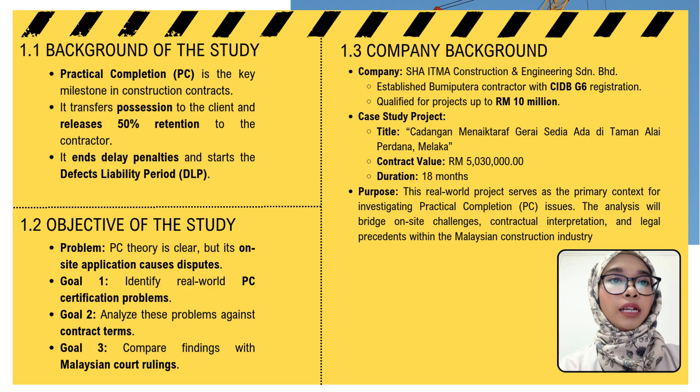This real-world project served as our primary lens. By examining the practical completion issues encountered here, we can bridge 3 critical perspectives, which are the on-site challenges, the contractual interpretation, and also the legal precedents within the Malaysian construction industry.

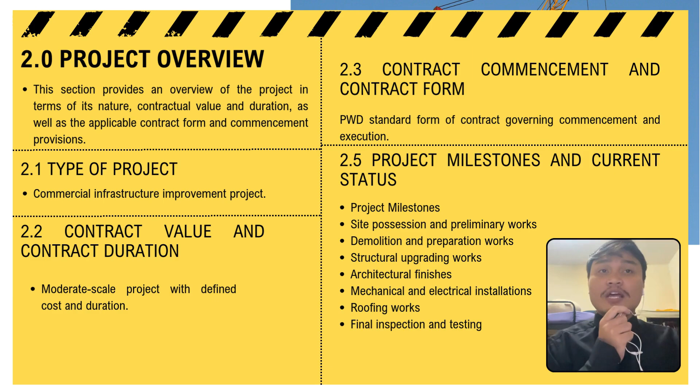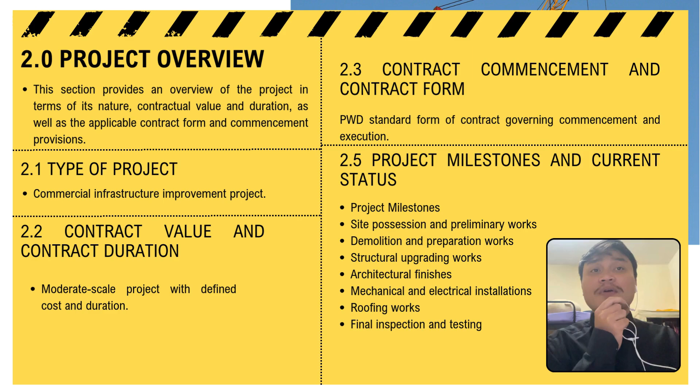2.3 is contract commencement and contract form. We are using a PWD standard form of contract governing commencement and execution. The project was executed under the PWD form of contract, with the contract commencement taking effect from the date of the letter of acceptance or the possession of site, whichever occurs later. From the commencement date, the contractor was contractually obligated to commence the works and complete the project within the stipulated 18-month period, subject to provisions relating to variation, extension of time and other contractual conditions under the PWD contract.

Next is parties involved: the client, the Majlis Bandaraya Melaka Bersejarah; the architect from Norman Selamat; the civil and structural engineer from Iras Perunding; and last but not least, the QS, ARR QS Consultancy Sdn Bhd.

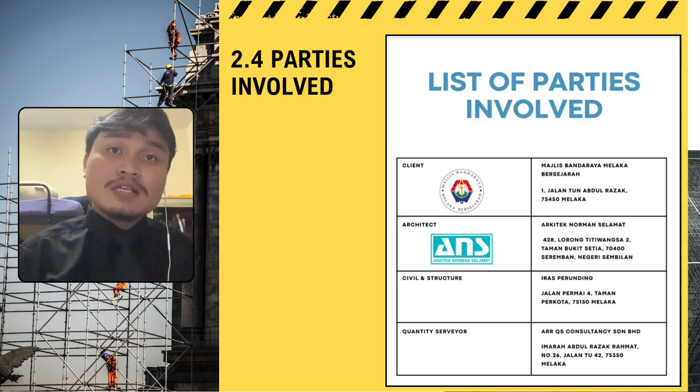Last but not least is project milestone and current status. Project milestones and construction stages. The project was carried out based on an approved construction program under the PWD form of contract, with clearly defined milestones to ensure systematic implementation and effective progress control.

The key stages included site possession and preliminary works, demolition and preparation of existing structures, upgrading works, architectural finishing, mechanical and electrical installation, roofing works, and final inspection and testing prior to completion. Current project status: the project has fully completed and has achieved practical completion, resulting in issuance of the CPC.

All construction works were executed in accordance with approved drawings, specifications, and contractual requirements, and the complete facility meets the required functional and quality standards for commercial completion.

Lastly is plan versus actual progress. Overall, the actual progress of the project closely followed the planned construction schedule. Most activities were completed within the stipulated time frame, and project performance remained generally consistent with the approved program.

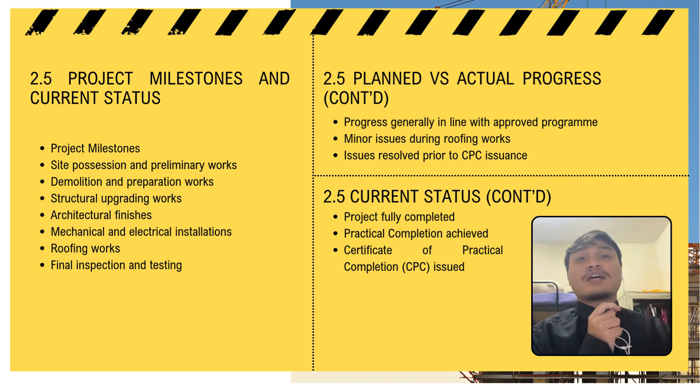Minor issues were encountered during the roofing work prior to the issuance of CPC. However, these issues were resolved without causing significant delay to the overall project completion. Further details on these issues are discussed in section 3 of this report. I will pass to Hazab to continue the presentation.

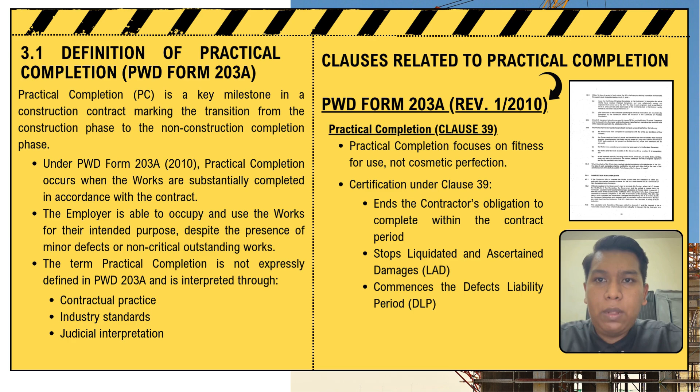The next important event is the inspection by the architect or consultant acting as the superintending officer, or SO, under clause 39 of PWD. The contractor must notify the SO that the works are ready for inspection, and the SO will then inspect the works to assess workmanship quality, compliance with the contract requirements and the overall fitness for the intended purpose.

Another critical event is testing and commissioning. Modern buildings involve mechanical, electrical and specialist systems that must be tested to ensure they are safe and operational. If the testing and commissioning are incomplete or unsatisfactory, the SO may delay the certification of practical completion. Therefore, successful testing, proper documentation and compliance with contractual procedures are essential before practical completion can be achieved.

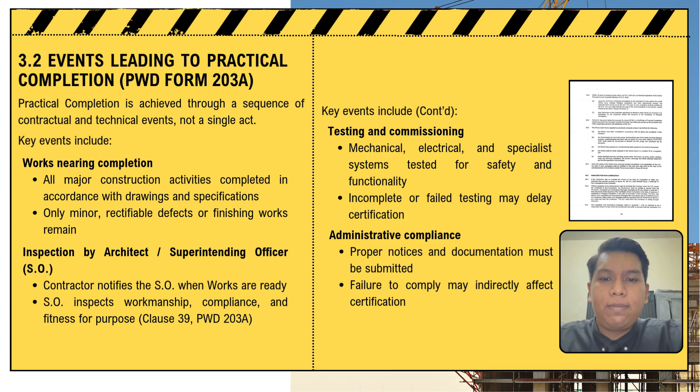Incomplete works are a more serious issue. If essential works or systems have not been completed, the SO is justified in refusing to certify the CPC, especially if the incompleteness affects the intended use of the building. Another major issue is outstanding testing, commissioning or statutory approvals. A building may appear physically complete, but without approval from the relevant authorities like BOMBA or final test results, it may not be legally or safely occupied.

Finally, unresolved contractual correspondence such as site memos, architect instructions or emails, or disputed variations can delay the certification. Therefore, the superintending officer must exercise professional judgment to ensure that all technical and administrative issues are sufficiently resolved before certifying practical completion.

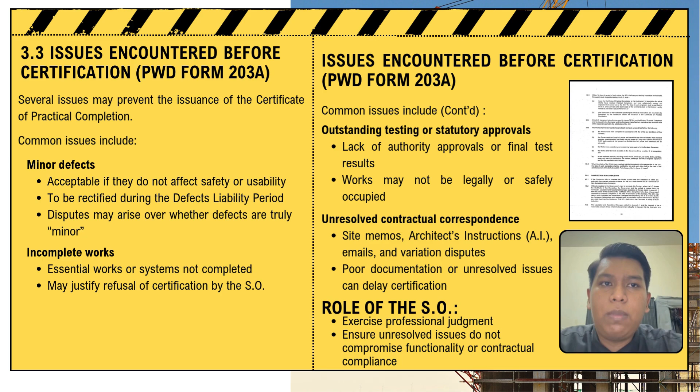My name is Muhammad Azami bin Muhammad Azman Bong, and now I want to present the diagnosis of the practical completion issue. First is identification of the practical completion issue. For our case study, cadangan menaik taraf gerai sedia ada di Taman Alai Perdana Melaka, the main issue affecting practical completion was incomplete roofing works.

The roofing system was a critical part of the project. During construction, the contractor discovered that the specified roofing material was difficult to obtain because it was only available from overseas suppliers. The issue was discussed with the client and architect.

A formal application for material changes was later submitted on 19 February 2024 by the contractor. The approval process took time because it involved design changes, color selection and coordination with the client, architect and MBMB. Final approval was only granted on 2 April 2024, so during this period, the roofing work could not proceed without approval. So, as a result, the roof was incomplete when practical completion was expected.

Other works such as internal finishes, inspection, and testing could not be continued. There were no major workmanship defects, but the incomplete roof prevented practical completion. The contractor applied for an EOT due to the approval delays rather than contractor performance.

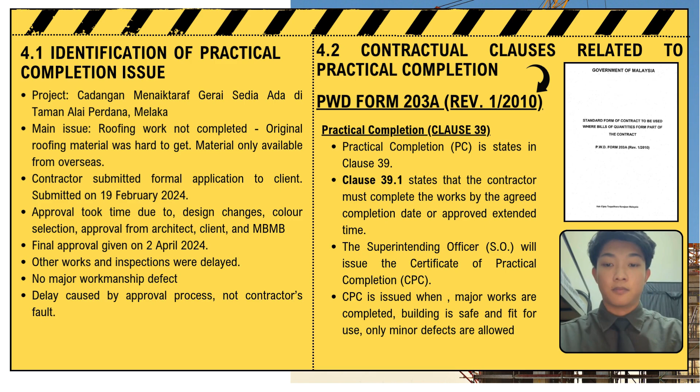Next is extension of time, clause 43. If practical completion cannot be achieved within the original contract period due to reasons beyond the contractor's control, clause 43 allows the contractor to apply for an extension of time, also known as EOT. Under clause 43.1(f), delays caused by late instructions, drawings, or approval by the SO or employer are valid grounds for EOT, provided the contractor submits a proper written application.

Next is variation, clause 24. Clause 24.1 covers variations. Any changes to materials or design must be formally instructed through a variation order by the SO. Works carried out without approval may be considered non-compliant and can delay the issuance of the CPC. Therefore, delays in approving variations can directly affect practical completion.

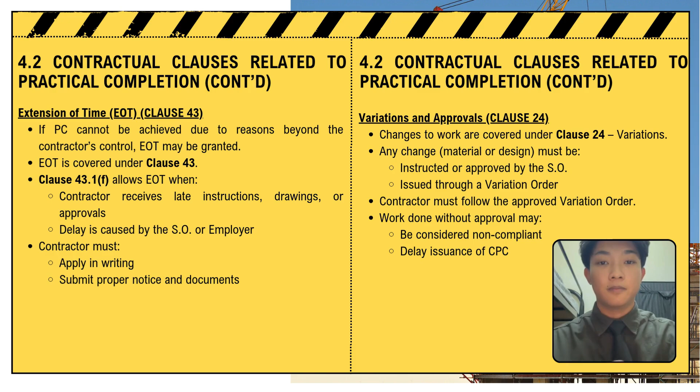And now the causes of the practical completion issue. The main causes of the practical completion issue for the project Cadangan Menaik Taraf Gerai Sedia Ada di Taman Alai Perdana Melaka were related to the changes in the roofing material. The roofing material specified in the contract was difficult to obtain because it was only available from overseas suppliers. So this situation was beyond the contractor's control and affected the planning and scheduling of the roofing system.

Another major cause was the delay in approval from the client. The contractor submitted a formal application for the material changes on 19 February 2024, but the approval process took a long time because the client and the MBMB needed to review the design, color scheme and the technical specifications. So, the final approval was only granted on 2 April 2024.

Next is the design changes. This also contributed to the delay. The initial roofing design required 8 layers, which increased the complexity and the cost. So the manufacturer later revised the design into 3 layers, but this revision still required formal approval before the work could proceed. And the last one is administrative procedures.

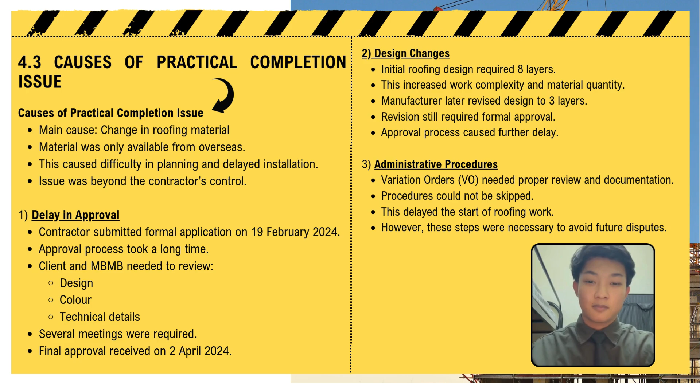Administrative procedures such as variation orders could not be skipped. These processes delayed the start of the roofing works, but were necessary to avoid future disputes. So overall, the delay was caused by material issues, approval delays, design changes, and administrative procedures, most of which were beyond the contractor's control. Next is the implication of the delay in achieving practical completion.

The delay in achieving practical completion for the project Cadangan Menaik Taraf Gerai Sedia Ada di Taman Alai Perdana Melaka had several important implications. Firstly, it affected the overall project schedule. Roofing works were part of the critical activities. So, other activities like internal finishes, electrical works, and the final inspection could not be started until the roof was completed. This disrupted the construction sequence and extended the project timeline.

Next, from a contractual perspective, the delay required an EOT. Even though the contractor was not at fault, formal documentation was necessary to protect against liquidated and ascertained damages, also known as LAD. Next, from a financial perspective, if the construction was delayed, the cost will also increase. Additional site supervision, labor, equipment rentals, and the variation order for roofing changes also added to the project budget.

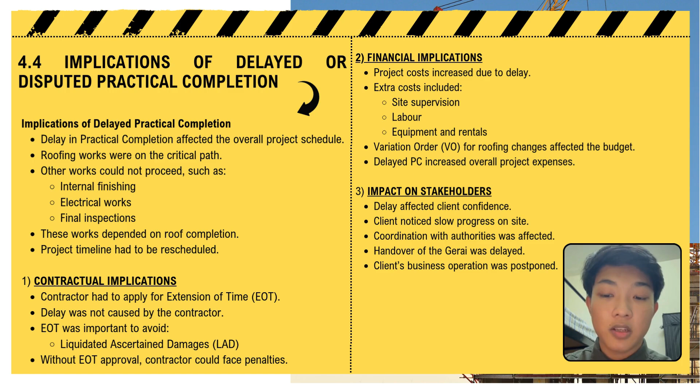And lastly, the delay affected stakeholder confidence. The client noticed slower progress, coordination with authorities was affected, and the handover of the project will be postponed. So it will impact business operations. So in conclusion, the delay influenced the project duration, contractual obligations, costs, and stakeholder relationships. Also, it highlights the importance of timely approvals, effective coordination, and proactive communication to reduce the impact of unforeseen delays.

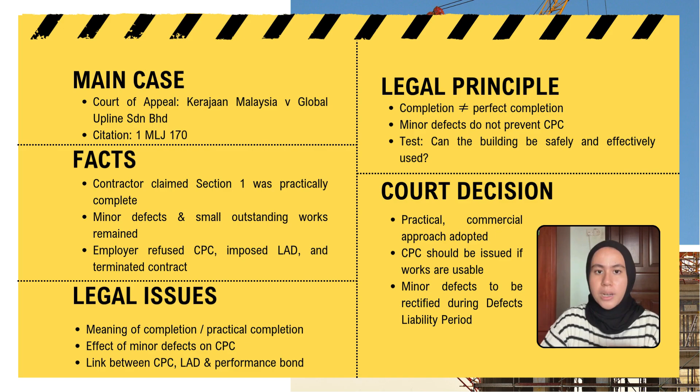Next, I will continue this presentation with a comparative analysis between the project and case law. For similarities, both situations share the same core dispute, a disagreement over whether practical completion had been achieved due to outstanding minor works or defects. It was a classic debate over what constitutes a minor versus a substantial issue. So the key parallels are striking in both instances.

The first one is client changes or late approvals affected the timeline. The second one is the central conflict was whether outstanding items were minor or substantial. And the third one is the dispute was about much more than just the work. It was about triggering major contractual consequences, which is the release of retention, the end of delay penalties, and also the start of the defect liability period.

For differences, the first one is SHA ITMA was a smaller local authority project, while Global Upline involved major federal public works. Second, SHA ITMA's issues were resolved administratively through project protocols. In stark contrast, the Global Upline dispute escalated to contract termination and full litigation. The third one is the procedure was different. SHA ITMA used a PWD contract focused on whole project completion. Meanwhile, the case involved sectional completion, adding another layer of complexity.

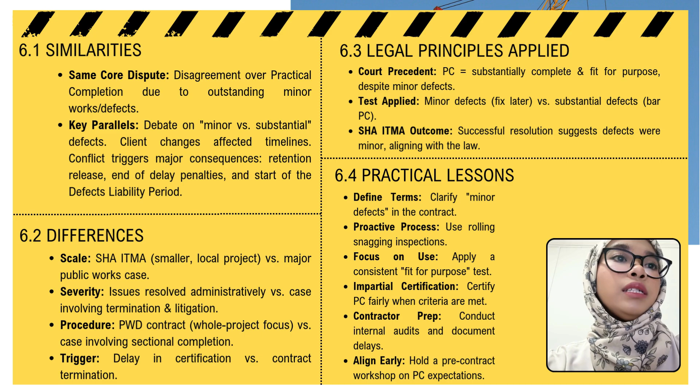For conclusion, summary of findings. Based on these findings, we propose targeted recommendations for each project stakeholder to better manage the practical completion process. For employers, three actions are vital. The first one is expedite your approval processes for variations and materials to prevent causing the very delays you wish to avoid. The second one is adopt a commercial and legal view of PC. Seek substantial completion and not flawless perfection. The third one is allow your superintending officer to act independently. Do not use the CPC as a bargaining chip.

Meanwhile, for the contractor, the mandate is clear. The first one is documentation is everything, especially client-caused delays and instructions. The second one is be proactive. Conduct internal pre-PC audits weeks before the due date. And the last one is submit formal detailed PC applications with all supporting documents to set a professional standard.

For recommendation, we must institutionalize better practices. The first one is clarify minor defects in the contract itself to remove ambiguity. The second one is implement rolling snagging inspections to create a collaborative living punch list, not a single confrontational final inspection. The third one is hold a pre-contract workshop dedicated to aligning all parties on PC expectations and procedure from the very start. And the last one is ensure the contract administrator certifies impartially, upholding the integrity of the entire process.